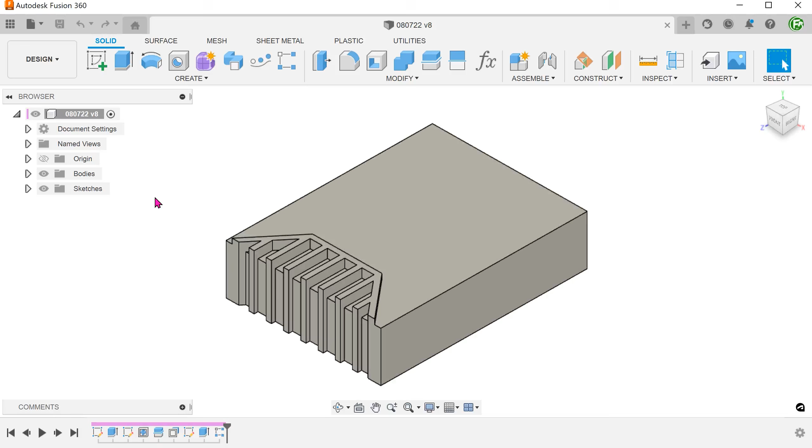I am preparing the external design of an enclosure here, and I'm trying to create this decorative pattern. Let's start with a cuboid and this simple sketch. I'm going to begin by creating this rib. The most straightforward way to produce this is to sketch a profile like so. I will leave that for you to try.

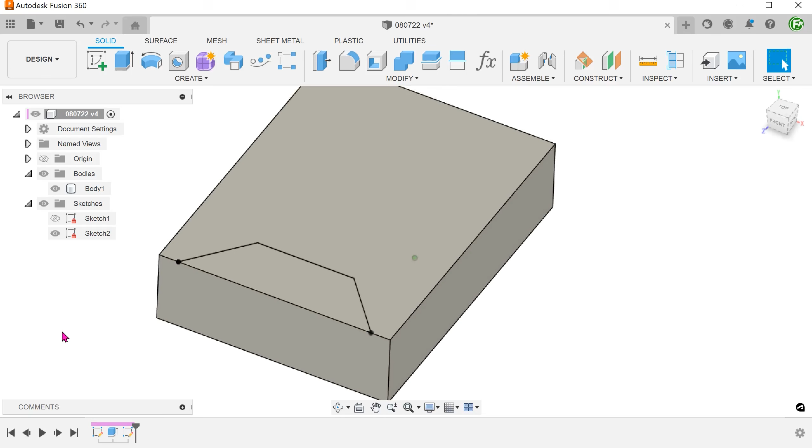Wherever possible, I like to explore the use of thin features. This will allow me to simplify sketches and not have to deal with too many offset sketch lines. Begin the extrude command. Select the thin extrude option and select the sketch line. Adjust the distance and wall thickness.

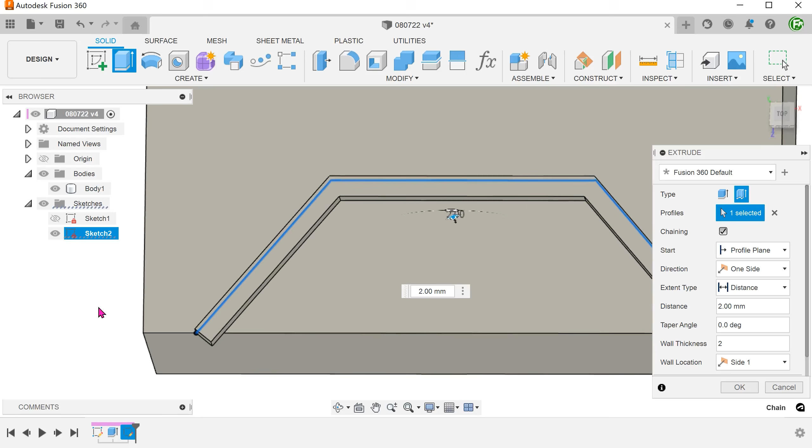The problem with the thin extrude is that it thickens in a direction normal to the sketch line. So the end face will not flush with this face of the box. Adjusting the wall location does not resolve this.

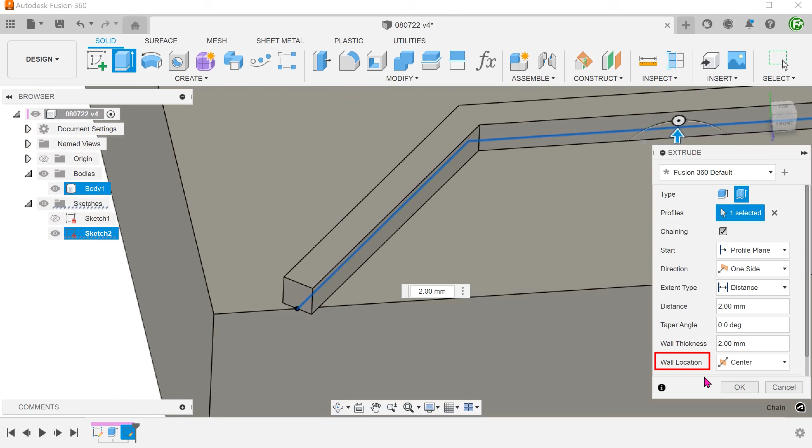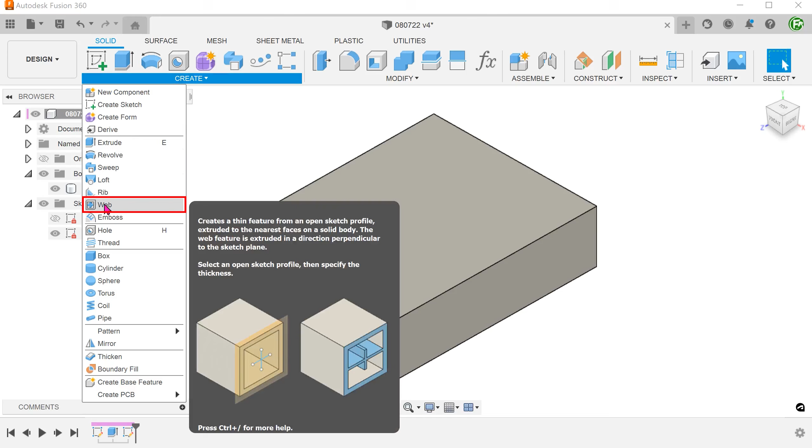Let's try to use the web command. In this scenario, this will be a slightly unconventional use of the command. The web command tends to struggle in an open top scenario with no side walls around. Let's experiment anyway. Go to Create, Web. Select the sketch line as a profile.

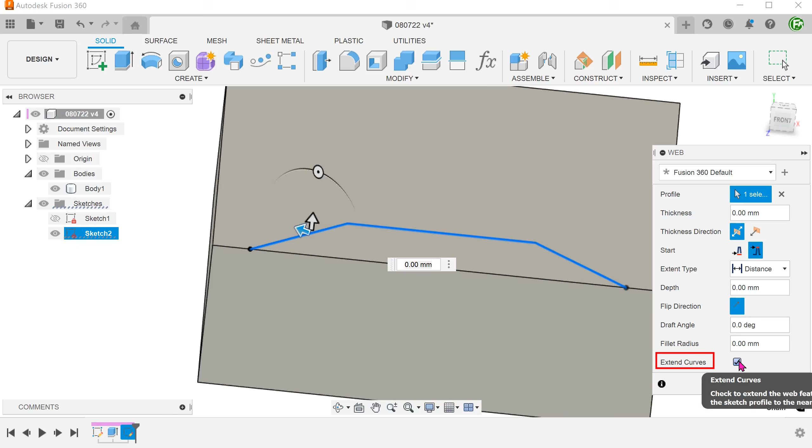In this case, there are no side walls to extrapolate up to, so for extend type, we need to select distance. You can see that the depth direction is pointing downwards. So flip the direction. Check on the Extend Curves option. Adjust the thickness and depth.

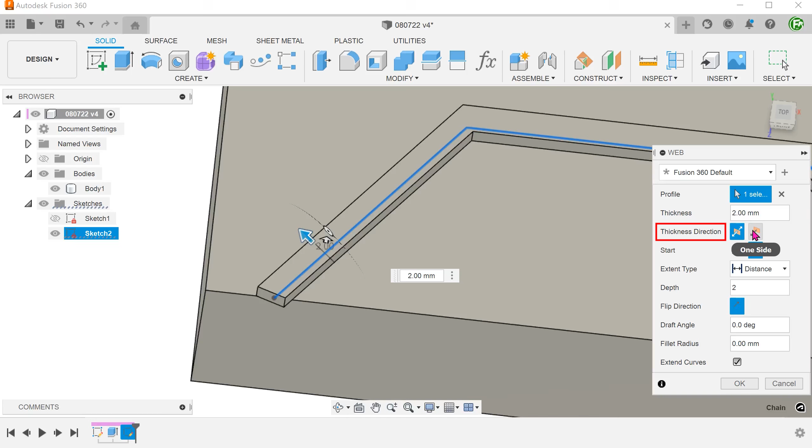So it looks like we have the same problem as a thin extrude. The trick here is to set the thickness direction to one side. Once we do that, the end face of the rib flushes with the face of the enclosure. This behavior is made possible by the Extend Curves option. We can test this out by removing the Extend Curves option.

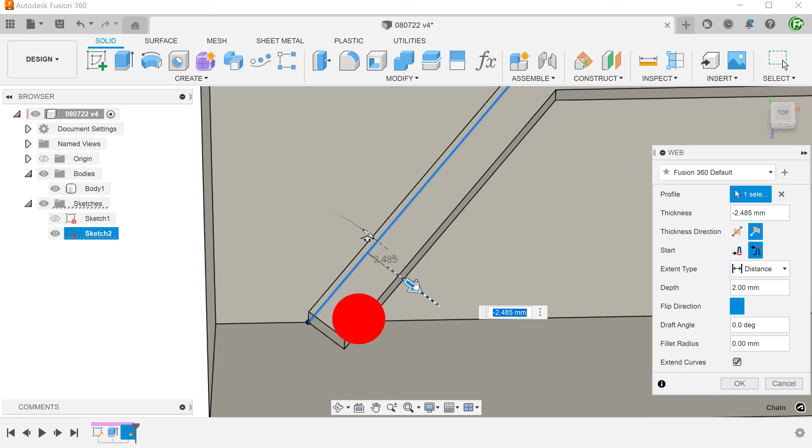Take note that this only works if the thickness is on this side of the sketch line. If you find that the wall produced is on the other side, simply drag to the opposite side or enter a negative value. If we look at the final model, we can see that these two faces are slightly recessed from the main faces.

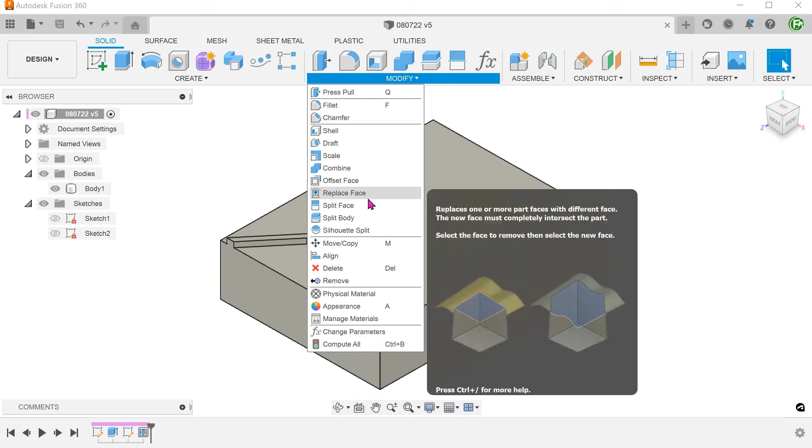Let's first try to split this face before doing the offset. Go to Modify, Split Face. Select this face to split. For a splitting tool, click on the select box. Bring back the previous sketch that was used to create the first rib. Select the sketch to use as a splitting tool.

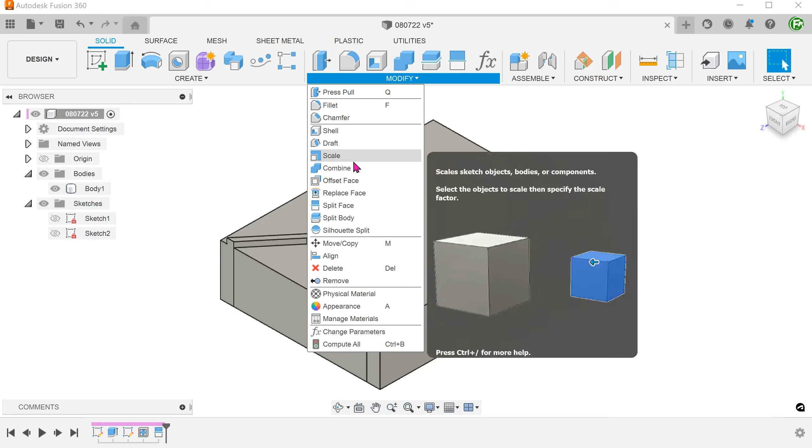Go to Modify, Offset Face. Select these two faces to offset. This will result in an error. Even if you perform this offset face one face at a time, you will still face this error. Let's try splitting the body instead. Delete the split face step.

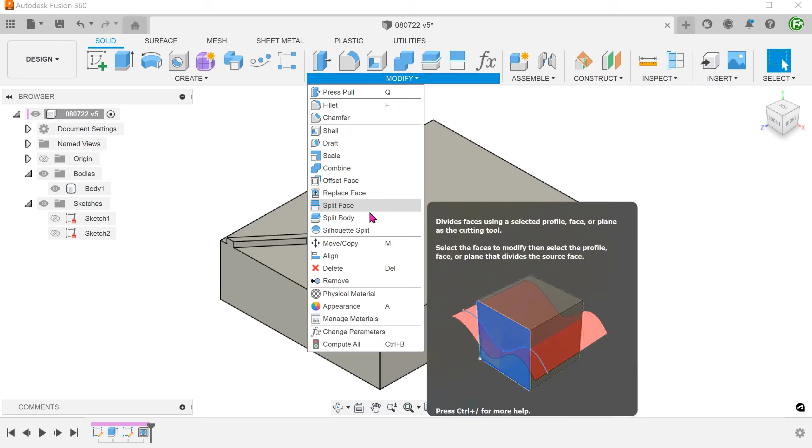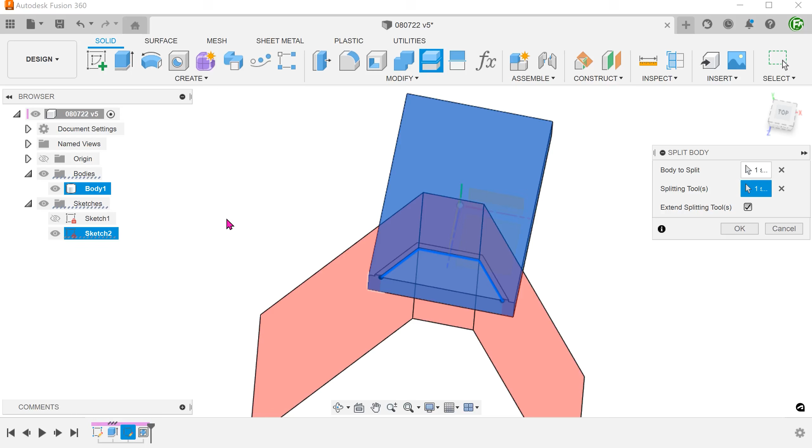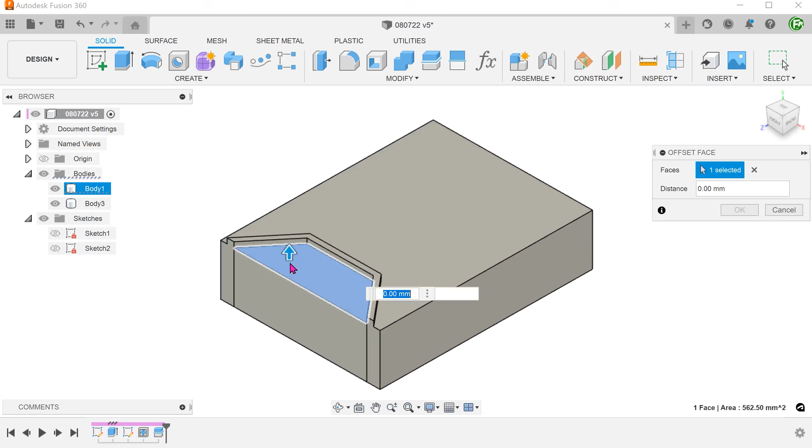Go to Modify, Split Body. Select the whole body to split. Use the same sketch to split the body. Perform the offset face as before. This time round, there are no issues.

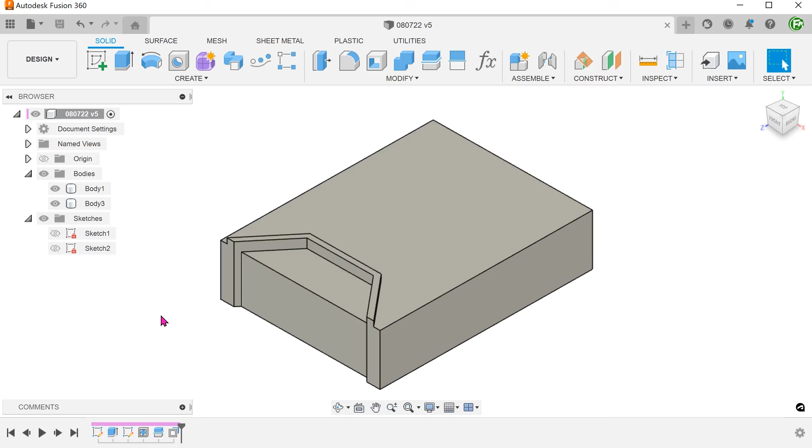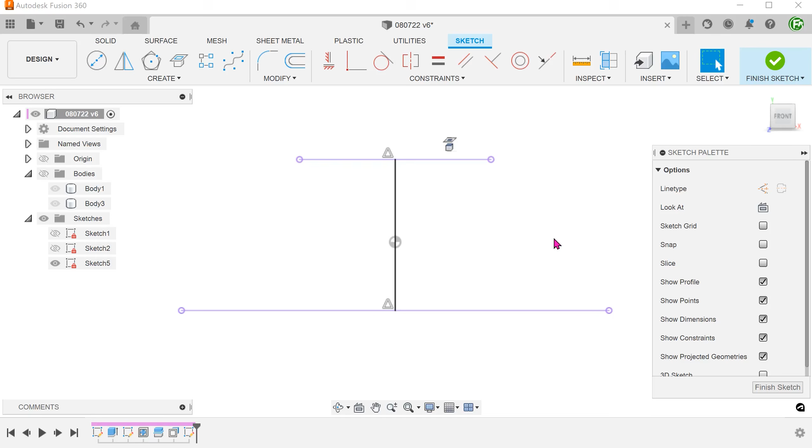Next, we shall go on to make these fins. Perform a sketch on this face. This will be a straight line down the middle that matches the height of the enclosure. We can hide these projected lines by removing the Show Projected Geometries option.

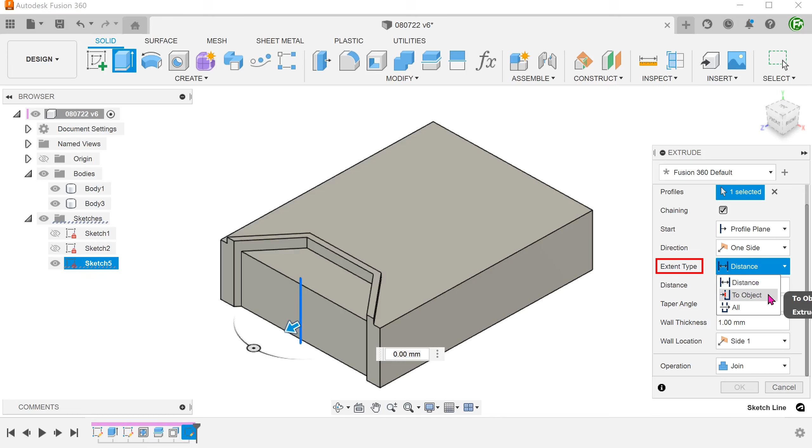Begin the Extrude command and select the thin extrude option. Select the sketched line as a profile. Set the operation to Join. For Extent type, set to To Object and select this face. When it comes to selecting faces, you need to be careful.

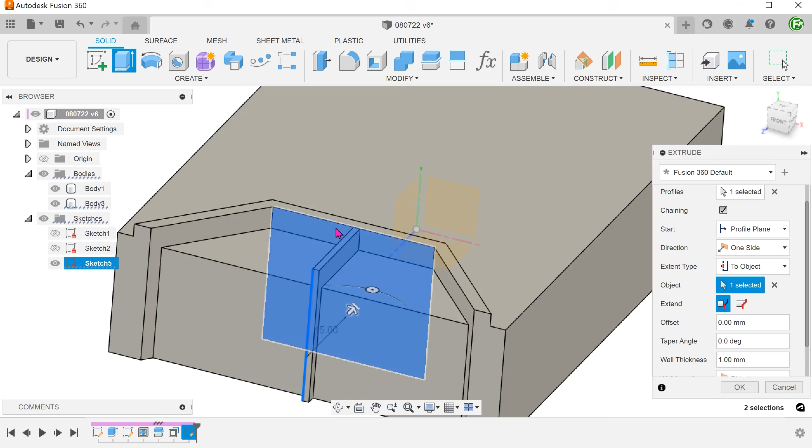When the cursor hovers over an edge, it highlights the whole body. If you click at this point, the whole body will be selected. Make sure to keep the cursor within the boundary. Adjust the thickness and wall location. Once we accept, the bodies merge into one since we set the operation to join.

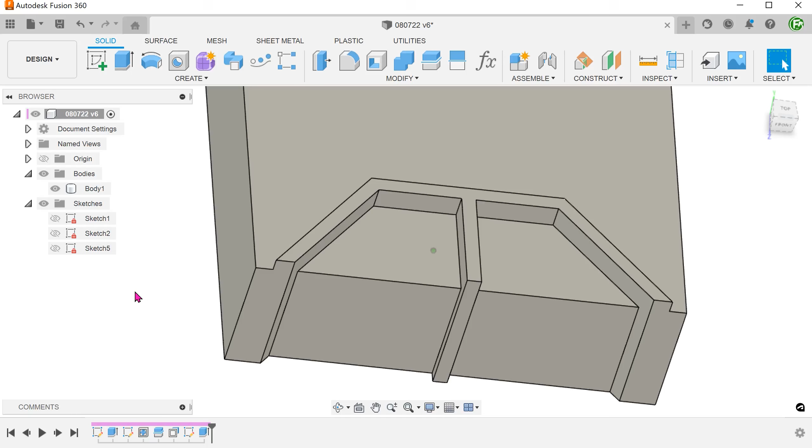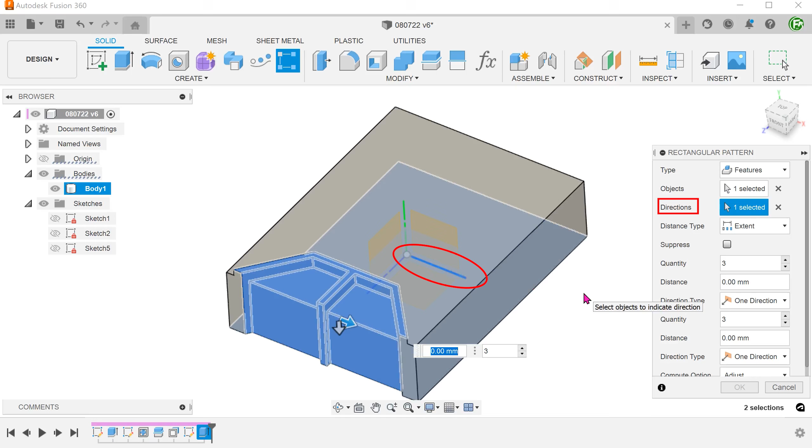Let's perform a rectangular pattern. Change type to Features and select the feature from the timeline. Select the x-axis as the direction. Adjust the quantity and distance. Make the direction type symmetric.

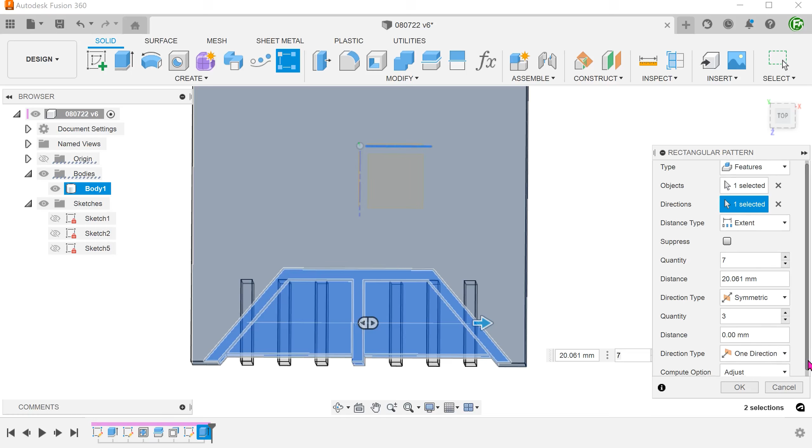I'm going to extend the pattern into the tapered regions to see whether it adapts accordingly. Let's set the Compute option to adjust. You can see that the ribs do not adjust. Both the Identical and Optimize Compute options do not work. I was hoping that the fins would recognize these two faces as stopping faces.

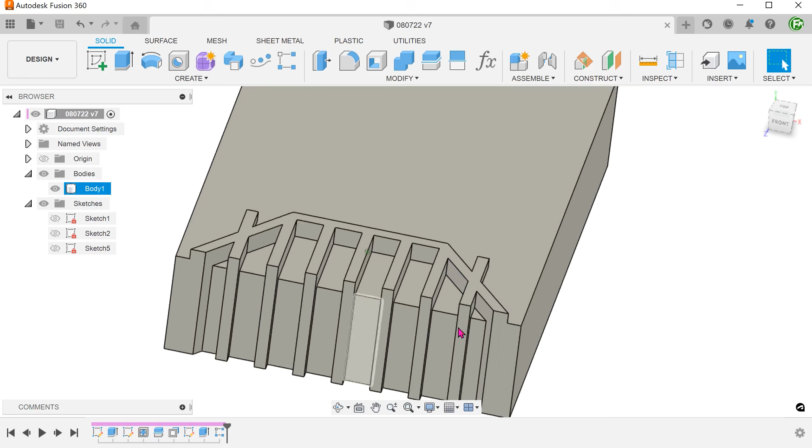Let's go back into the extrude. Could we have set the Extend option to adjacent faces? The answer is no. Instead of extruding up to a face, a better way to do this is to extrude up to the body.

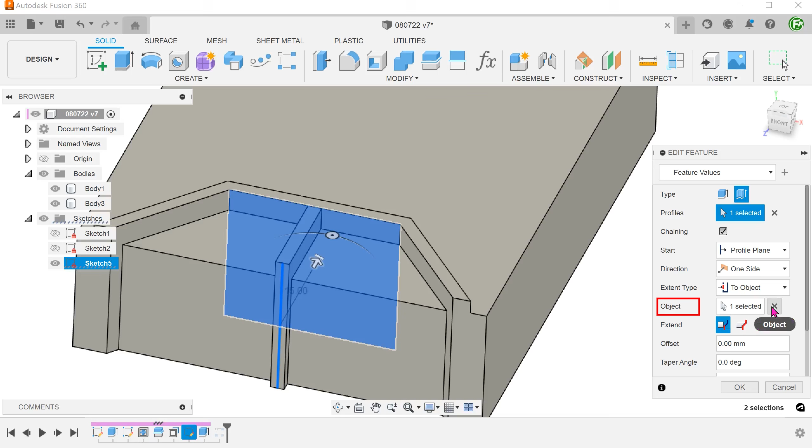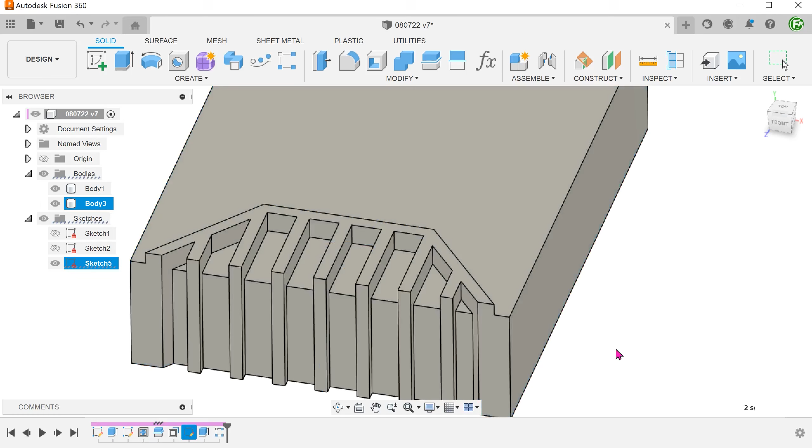Remove the object selected. To select the body, hover the cursor over an edge. Check to see that the whole body is highlighted before clicking. You can also select the body from the Bodies folder. If we click OK, we can see that the pattern generates successfully. By selecting the whole body, the extrude would automatically terminate up against the nearest faces, which would include all three of these faces.